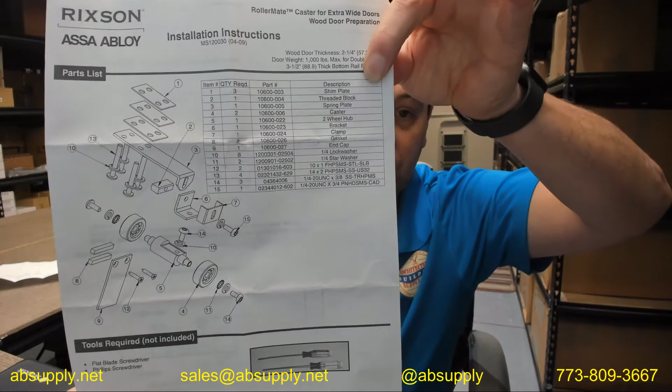Okay, so as I'm just removing the 3 or 4 screws that I put together here, there are installation instructions below this video that are going to give you a manifest of all the parts. The only deviation I see is that part number 7 is not included here. There must have been a design change, because this order has 2 of them on it for a customer.

I'm going to say that it must have been a design change that this clamp is not included, because it seems as if it's just simply not required. So this clamp, my review of this will not include that. Let's go over the manifest of these parts.

3 shims. These are going to, if necessary, go underneath the mounting plate to drop that installation down. We're going to do dimensional properties of this stuff as we go through. 2 1/4 by 1 1/4, 1/16 of an inch thick. They seem, since we have the caliper, let's test it. 0.059, 0.059, 0.059.

So yeah, 1/16 of an inch, which is 0.0625. 3 shims. Okay, part number 2 is going to be called a threaded block, and that is indeed here. We've got that threaded block here. Overall length of that piece is about 1 1/4 inches.

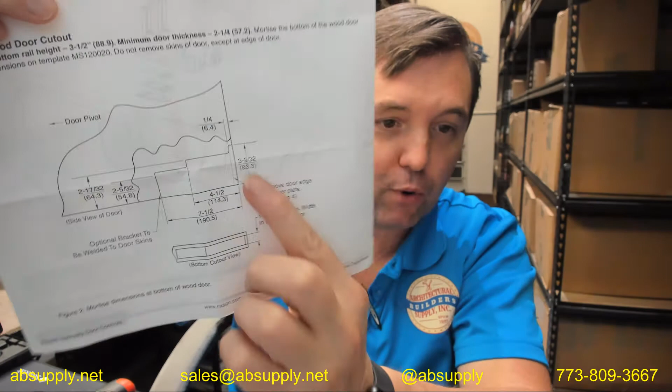You just need to make your prep cutout look like this line. Let me accent that a little bit with my pen—make it double thick. You just need to make your prep look like what I've made thicker there.

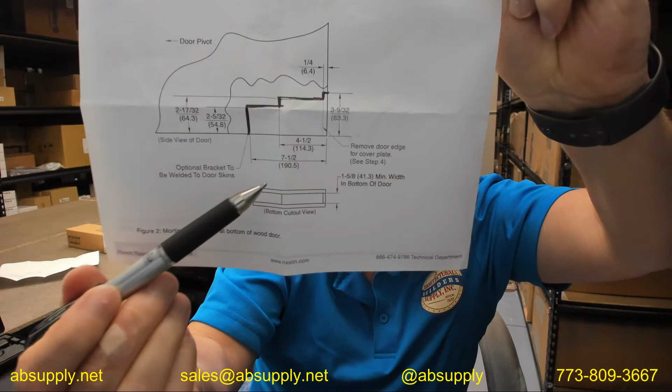But be mindful, you're only prepping all that 1 5/8 wide. This line refers to that line. That line refers to the fact that you're not mortising that all the way out—well, you are, but you're going one little notch up above there as well.

So the first time I saw a preparation like this, I said to myself, well, okay, all I need to do is make my door look like this. Then you employ your tools to go about doing that. If I was going to do this prep—no, not a hammer and chisel, no.

No, I would definitely be using a plunge router with a long 2-flute carbide bit. I would be doing that preparation all the way, the entire 7.5 inch, until I got to 2 5/32 deep. I would then adjust my template and continue on for the additional 12/32 of an inch depth at the 4.5 inch, and I would exit all the way out the door if I was going to for sure be using the end plate.

And then that last little bit there, I might do by hand—that little 1/4 inch amount—or I'd come around to the other side of the door and buzz that out with my router.

Making templates can be difficult. Porter Cable has a lock face template that I've used with great success doing stuff like this. You have to set it up, set your length and width for the preparation. If you expect you're going to do more than one of these, you might want to make a template for yourself so you'll have repeatability. If you're only going to do 1 or 2, I probably wouldn't bother to make a template. But if I was going to do 3, I'd probably make a template for myself to achieve that preparation.

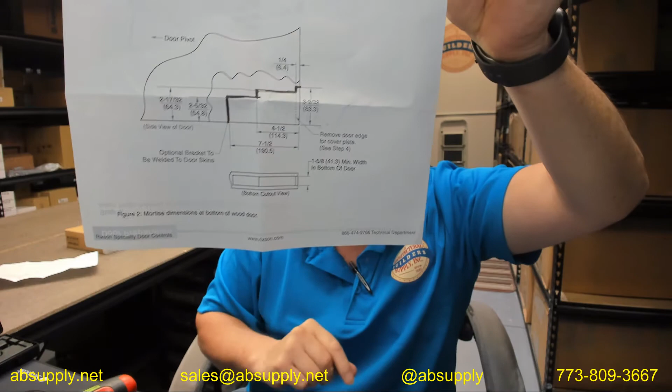Because that prep is 1 5/8 wide, that's why they're saying you can't have a door thinner than 2 1/4 inches. The wall thickness would literally be 1/16 of an inch, in fact less than that. If you mortised 1 5/8 wide with a 1 3/4 door, and put a caliper on that door, it's not going to be 1.75. It's going to be 1.71 most likely, which means your wall thickness is going to be 45 thousandths, which is literally just the veneer. So if you pushed your thumb on it, you would crush it all in.

Is it possible to do this? It is. Is it likely that you're going to take that router, tip it out, and explode out the other side of the door? That's possible as well. So be mindful, 2 1/4 inch thick is what the factory says.

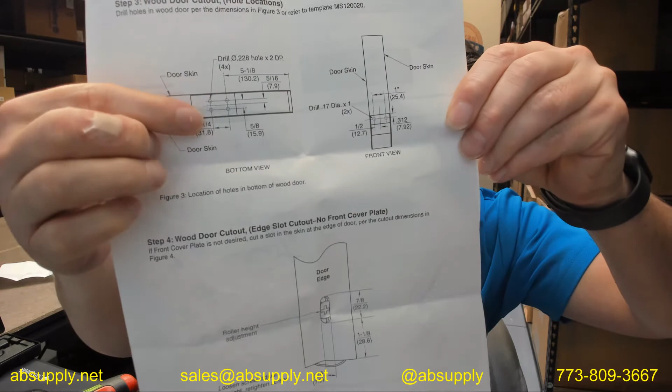Wood door cutout hole locations. So it gives you the locations of where the spring plate will reference for where the screws are going to go. Absolutely, my goodness, pre-drill the screw holes, because that is an epically large screw, if you recall. They want a .228 diameter hole.

Four times for that spring plate mounting. You can also see here where they want you to prep for the end plate. Those 2 holes are those 2 holes.

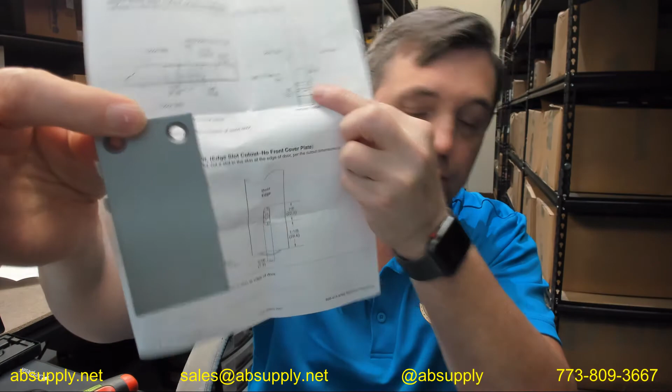Now, you don't have to prep it all. You don't have to come all the way out to the edge of the door if you don't want to. And that's why reading the installation instructions before you start cutting is crucial. You can do a preparation like that as well, where you can leave the heel edge of the door, which would be super elegant and what I would like to do, and slot yourself a hole for the adjustment. We're going to get to that adjustment in a moment.

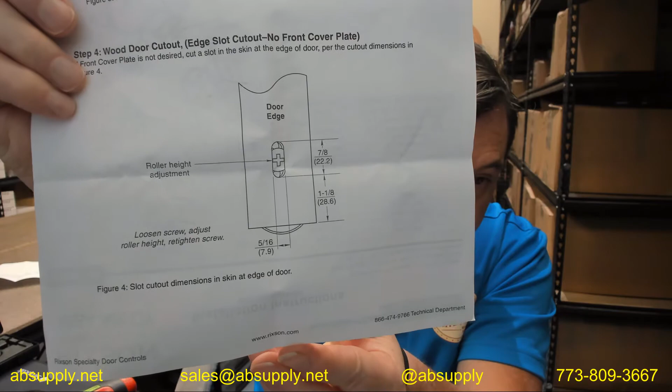Okay, now we're looking at the edge of the door. Then the last page talks about doing a steel door preparation. And again, you just simply need to make it.

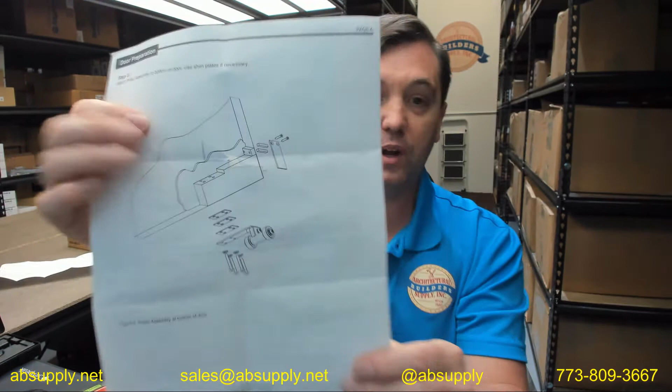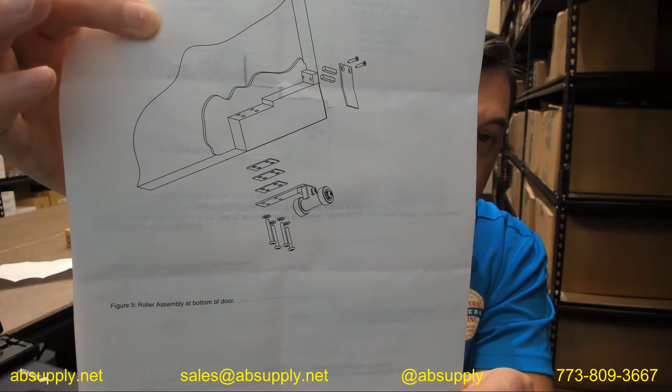Forgive me, they do not show a steel door prep at all. Someone who is metalworking is going to be able to look at this template and realize, okay, that's what it needs to look like, and let's just go about business and make it look like that. So this part of the installation instructions is really the best overall summary of what this is supposed to look like.

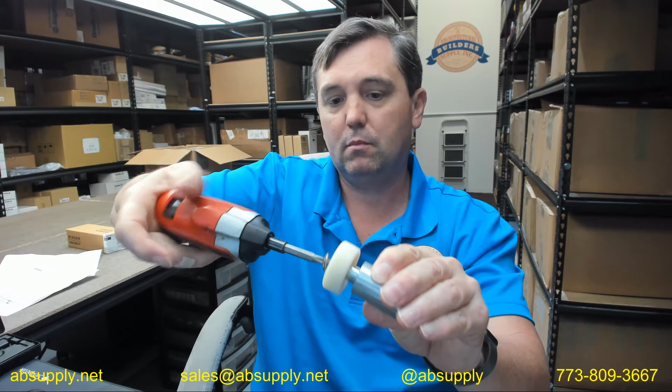Taking my little screw gun here, I can quickly assemble all of the parts. Caster goes on, and I've got these pieces pre-put together. Again, when I do my rough work, I'll use a little tool like this, but I do hand tighten. I don't tighten permanently with a screw gun because you can't control it. There's no good feedback coming back to your hand to know how tight something is, and you don't want to take a piece of hardware like this and strip a screw, break a screw, strip a hole, things of that nature.

Now my clamp is going to go on with my other screw, and when you lay out all of the screw parts, you know, putting together a piece of low-end imported furniture is far more difficult than putting this together. This is obvious, simple, and straightforward.

Then our spring bracket's going to come like this. Oh, actually, I've got that backwards. I'm glad you were here catching me making mistakes. This clamp is not symmetrical. The long end has to go up, I've just realized. There's a particular reason for that, which when you try to put on the spring plate, you'll discover.

That's because this will need to ride into that space there. And when I had it the other way, I didn't allow myself enough room. So what needs to happen now is the block needs to go like this with the screw, so I'm going to just put it here on my desk and get it started very loosely. Loosely, that's what it all looks like.

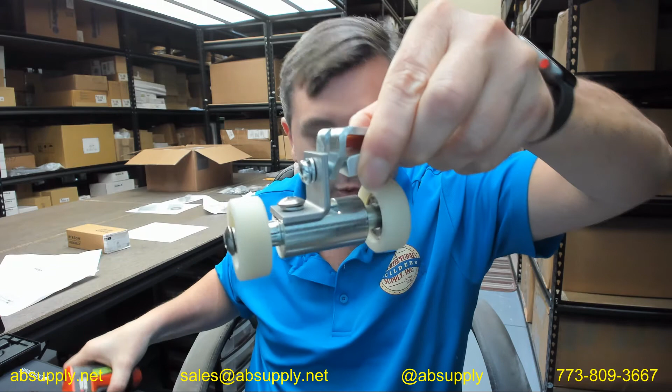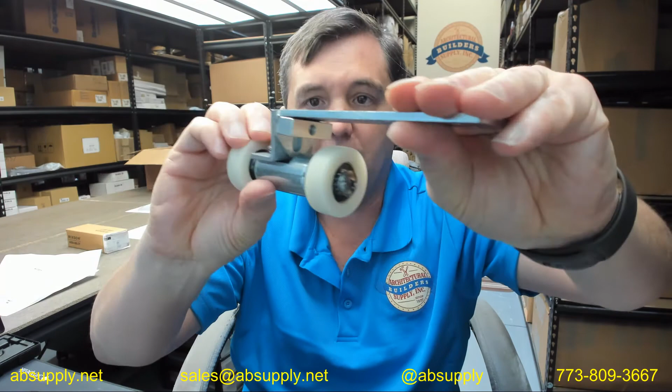I can affect the positioning of that spring plate based on the slot that's in here, and it can seat all the way down. Otherwise, that's kind of what it's going to look like.

Then after that, all I have left are my 3 shims. I've got my end plate with its 2 wood screws, sheet metal screws, and 2 machine screws. Then I've got my 4 and 4, each with their lock washers. That's all that's left. Now you're done with the installation, the assembly of the material.

Obviously, you're going to want to lay everything out dimensionally. You're going to want to work the door in the flat. You're going to want to get all of the hardware attached.

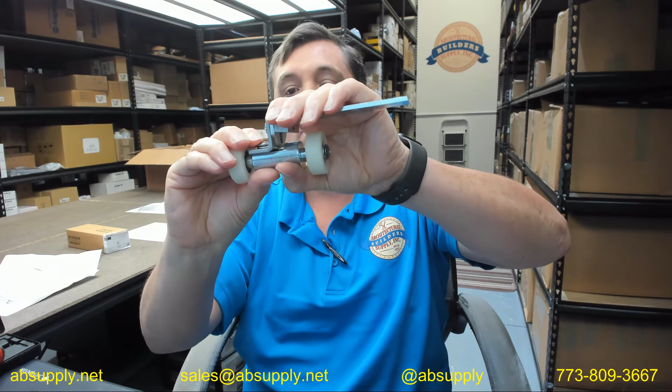I would bring this to a minimum dimension, so I can get the door hung, and then by accessing the end of the door, affect where all of this is going to sit, whether I have the slot that's prepped or the end plate. Shim this as necessary. The problem, however, is once you get the door hung, you're not going to be sticking

shim plates in there. Well, I suppose it's possible, but you're going to want to work that in the flat when the door is laying down. I predict the door coming off the pivot at least once if I was installing it.

That exhausts the installation instructions. We've gone over all of the goodies regarding that. The name Rixson is synonymous, utterly, literally synonymous with pivot hardware.

Their name is associated with many other pieces of hardware, such as floor closers. So when it comes to floor closers, the name Rixson is one. If you make a living, or at least remotely get into the industry of commercial door hardware, you will run into Rixson. We have been working with Rixson floor closers for decades.

We provide a service where we can arrange the rebuilding and repair of floor closers that were discontinued decades ago. I think our record is 1904, the year one was manufactured that we've been able to successfully bring back to life.